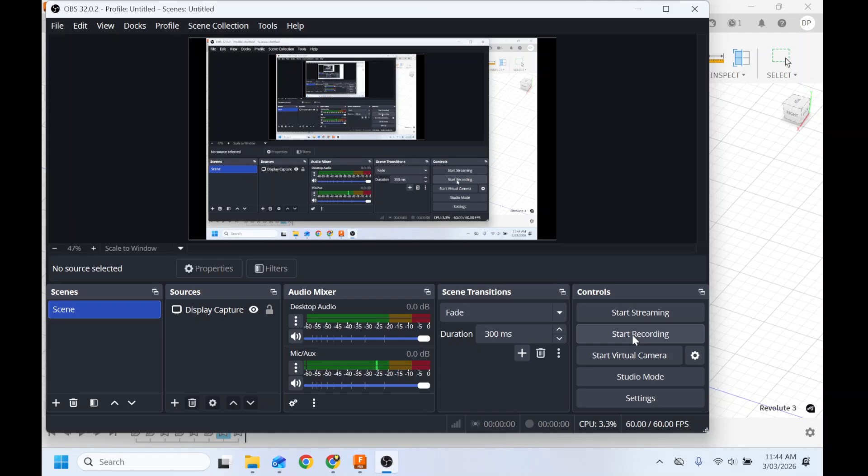Right, this is the tutorial I have where we're going to try to do a piston and liner and crankshaft combination of a motor. The main thing is I'm going to show you how to make individual parts in a single design and then use those to have some sort of relationship so they can be moving.

The moving part will probably be in the next tutorial. We're just going to be making multiple parts inside a single design, and we'll get to something like this. Just let me stop this because, okay, this is the model that this was based off.

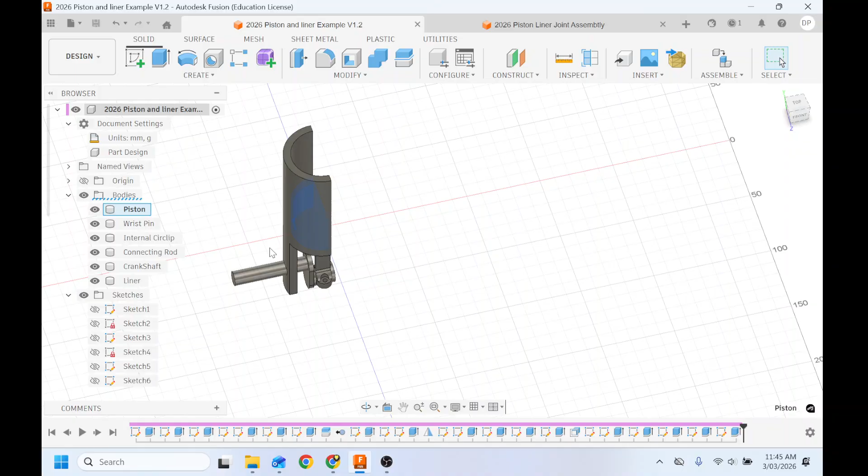Here we have our individual components, and we're going to get to some setup where we can get these individual components of the piston and liner combination. We can even go into more detail, like doing more detailed parts like C-clips inside the piston, and some things don't actually matter because we don't need them to move relative in our design. But this could be relevant if we do stress analysis later, since if this internal clip isn't there, we're going to have a groove inside there. So that could matter for that.

So we'll start by making a new design. We'll make a part design. The way I did this is I started by making the piston first. Now, all my dimensions don't actually matter because I'm just spitballing them and doing them quickly, doing things that make sense visually. Obviously, if you have a real design, you can base it off that single dimension.

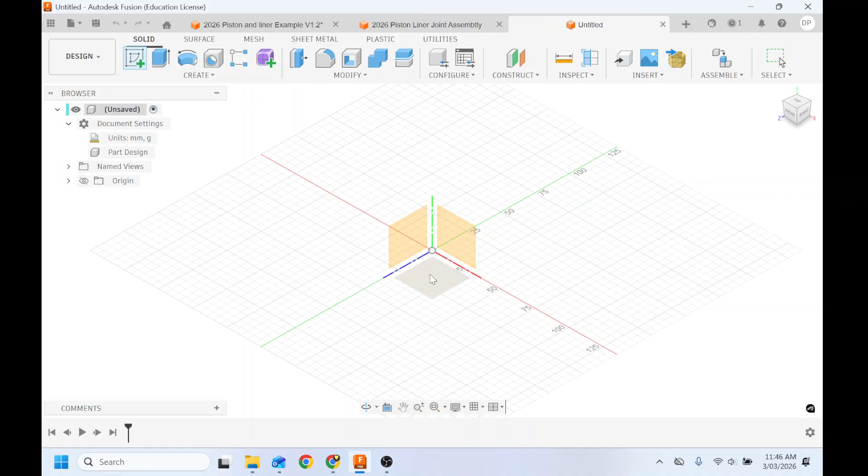To do our piston, we're going to be creating on this flat surface. We'll start by making a circle. Let's say we just make it 50 mil diameter. Done. Then I'm going to start by making the skirt and the outside of the piston first.

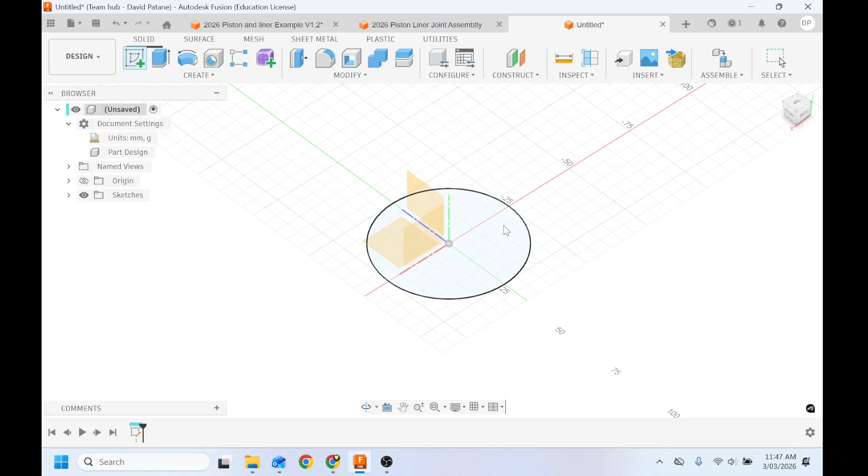So I'll make a sketch. What I want to do is have another circle, hold on, I'm not doing a sketch, let me edit this first sketch I did. So when you previously had Fusion, you would have had this circle, then you would get this circle, and you would extrude this circle into a cylinder, and we could work with that.

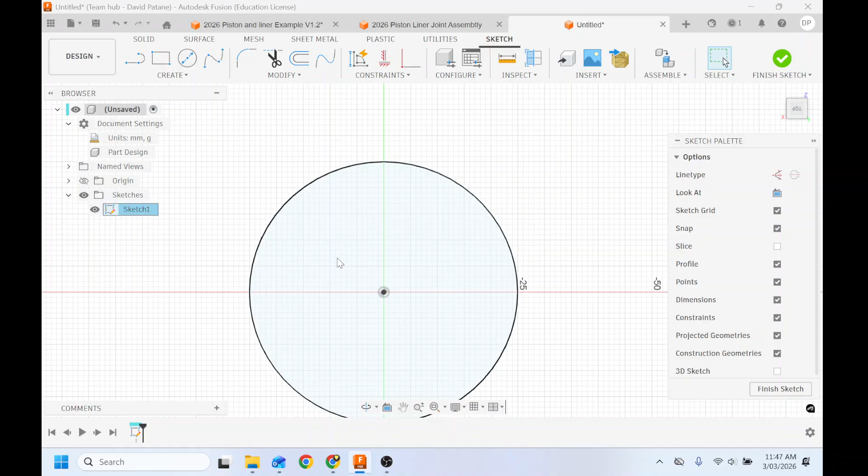But let's try to be a bit more accurate with our drawing here, because when we combine this later, one of the ideas engineers use CAD for is they can change their design halfway through. So let's edit this sketch. We know the insides of pistons are typically hollow to save weight, because you don't want a large weight moving up and down at like 3,000 times a minute. That's going to produce unnecessary load. So we know that the cylinder is going to be hollow.

So what I want to do is add another circle here, and I want to start using the sketch dimension tool, and use that so I can manually put in the exact distances I want. So I may have sped through that, let me do that again.

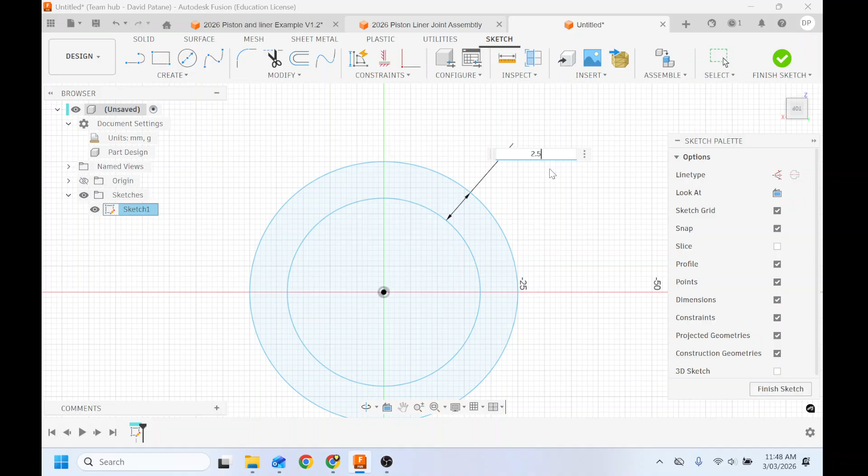So we're going to go to create, once I have my two circles, I'll go create sketch dimension. I'm going to click the inside diameter and the outside diameter, and see how my arrow is showing the distance between those two circles is 7. And so I can change that now - I can say I want the outside skirt of my piston to be, let's say, 2.5 millimeters.

That's the size, but also it's shrunk the outside of my cylinder. So what I'm going to do here is create sketch dimension, click the outside of the cylinder, and over here I'm going to make this again 50.

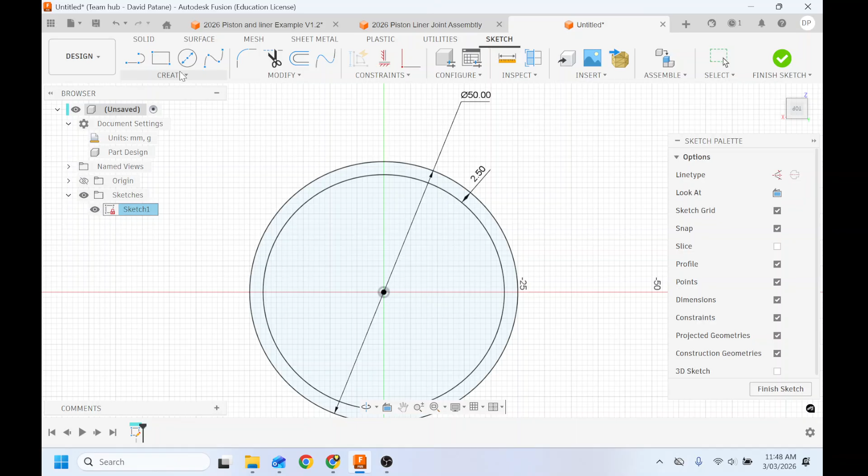Now, if I wanted to also adjust the inside diameter using create sketch dimensions, it's not going to let me do it easily because if I click it, it's going to say you've over-constrained this dimension. You've already said how much you want the outside diameter and how thin you want the skirt, so you can't also choose the inside one. That's called a driven dimension - you can get it to show the answer, but we can't adjust it. So we don't need that one.

Then in my particular sketch, where we're going to have the wrist pin attached inside the cylinder, we want a bit more meat over here in our piston. So we're going to get a line. Let's say I want to bring my mouse anywhere over here where it has that X, which means it's attaching to that line. I'll just click anywhere and go straight down to the other side.

And this line, I can do the same thing - I can do a sketch dimension. I can press this line and say how far away I want that from the center.

And I can pick a number. Let's say I want this to be 15. And then that line's going to come out at 15.

And then I can do another line like this. We can just join this one manually, because that way it will follow the other side.

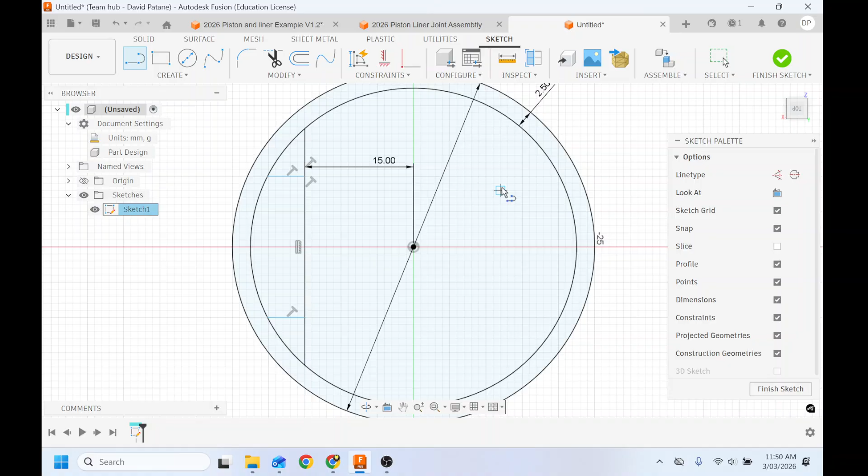I'm not going to mirror it because I'm going to cut this cylinder in half, just like in our previous example. But I have my shapes here, and the last thing I'm going to do before I'm ready to extrude this into a 3D object is fillet this rounded part over here. But it's not going to let me fillet here because I have a circle and a cut line, and it doesn't like that.

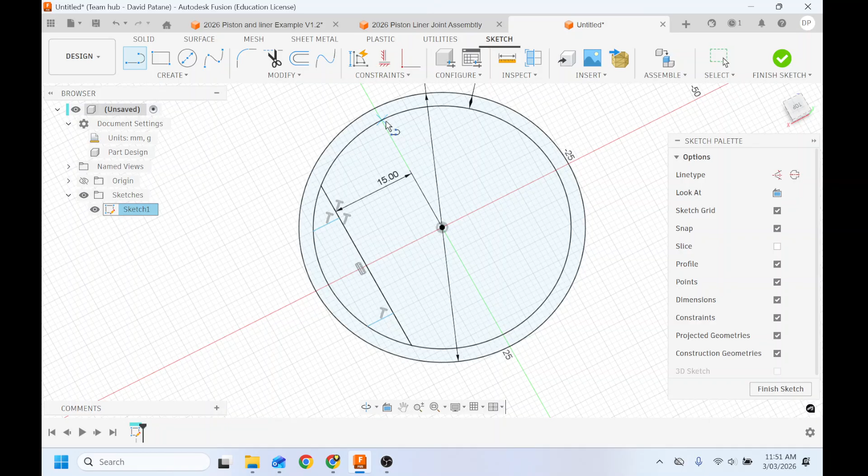So how I found we do this is we actually cut this. Okay, we will actually cut this cylinder in half by doing a line just right through the middle, and we're going to use the trim tool, and we're going to get rid of this half of the piston that we don't need. So this is the part of the piston, the drawing, we don't need.

And now I can go to my filleting tool and press this portion and this portion. That's going to just make it look like a more realistic piston. Finish sketch. This is going to be the skirt of our piston.

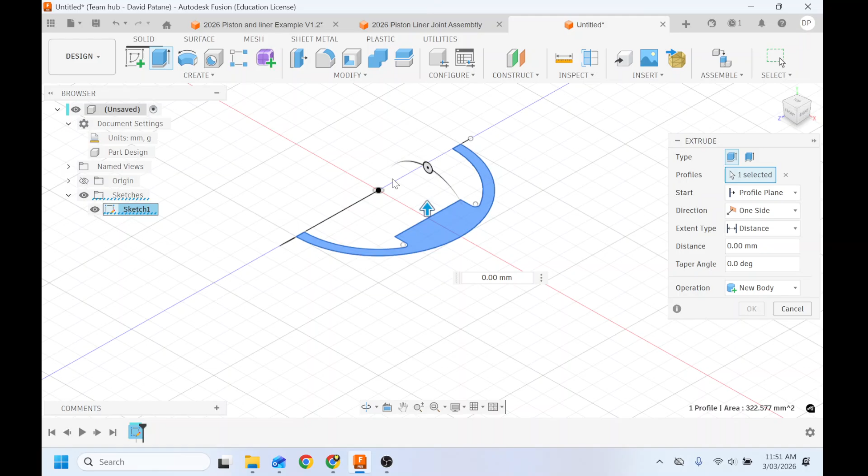I can press extrude and select this profile, and we can just make it as large as we want. So this is going to be everything except the crown, which is the very top part of the piston, after.

So let's just say we want this to be 30 millimeters, just the dimension I have here. And I'll press OK. And then I can make the top of the piston as well.

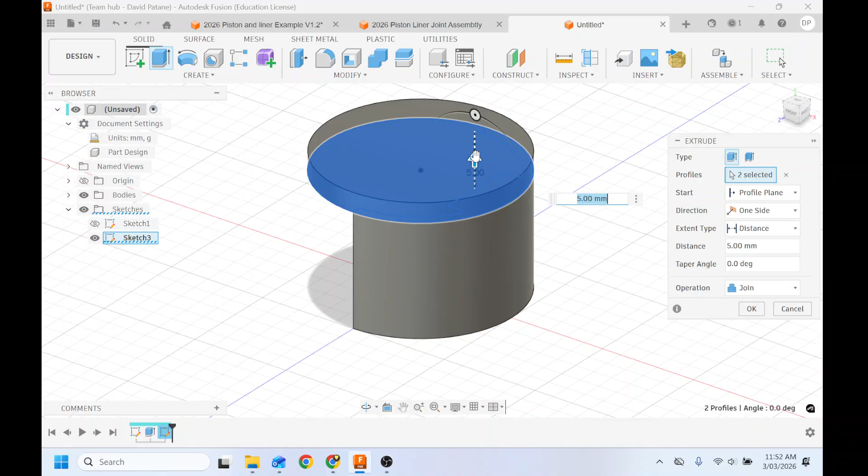I'm going to sketch based on that top graphic. Make a whole circle, press finish. And I'm going to extrude, and for this part let's just say I do the whole thing. And let's say I want it to be 5.

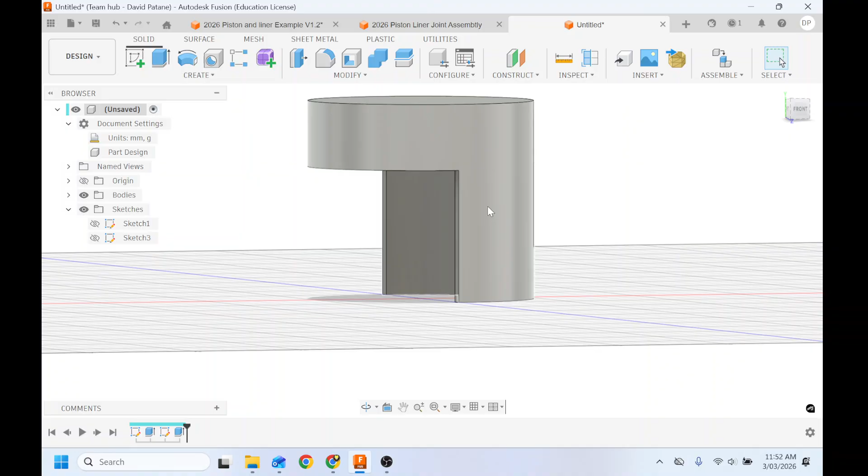And now we can add some features as well to this particular piston. Let's say we want to add some of the ring lands for where we're going to put in the O-rings and the oil grooves. How I would do that is I would go sketch, sketch on a side profile, and I want to use this line as a guide for where I'm going to gouge out some lines in my piston.

Before we do that, we're going to project and include this shape into our drawing. Is it project and include? Project.

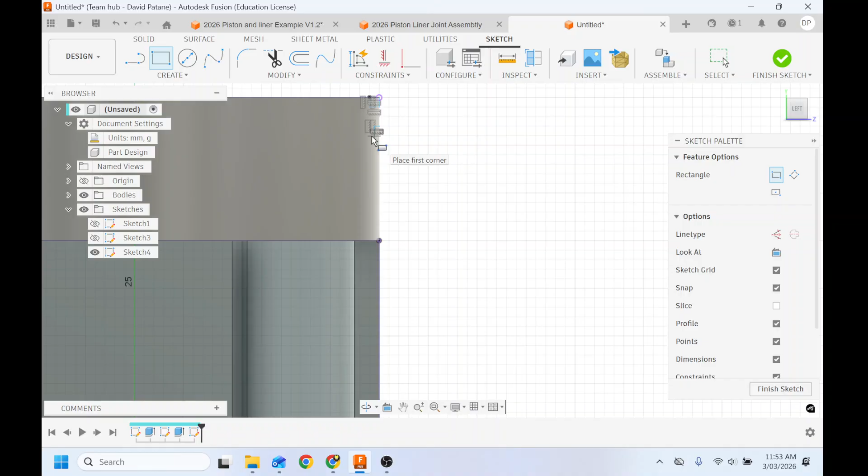So I have these lines here, and now I'm just going to freestyle something that I think looks good. I don't know.

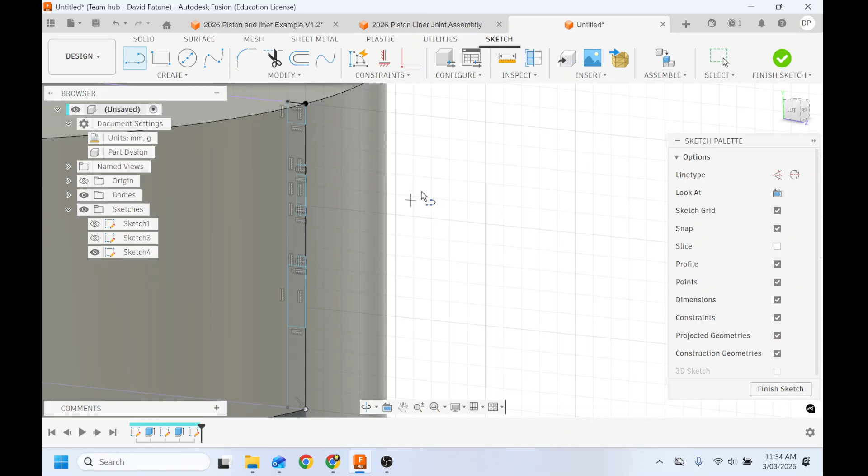Okay, so I have these lines here. I want to make sure I have these parts. These are the parts I want to cut out. Yeah, okay, we'll finish that sketch. We will then, I need this diagonal line, so I need to actually edit that sketch a bit more.

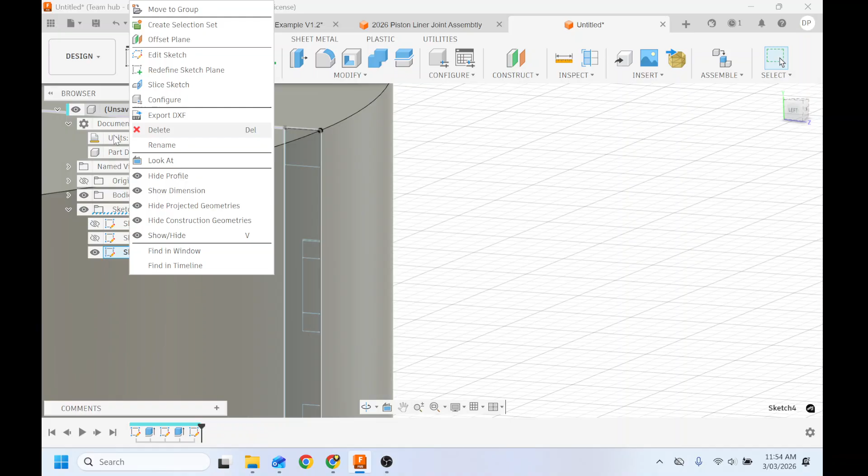So I'm going to use the revolve tool, and I want to select these parts. I want to select this and this, this, and I don't have the big one. I guess we can do this one.

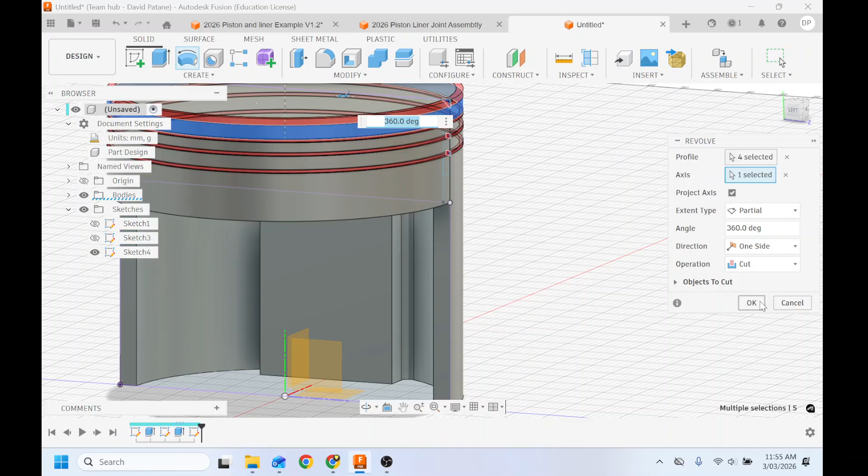Actually, we will ignore the bottom one. I will just do those ones, and the axis I want is the axis of the cylinder itself, and then I'll press OK, and it's going to cut that part of the cylinder, giving us what the top of the cylinder will look like with the ring lands and the crown.

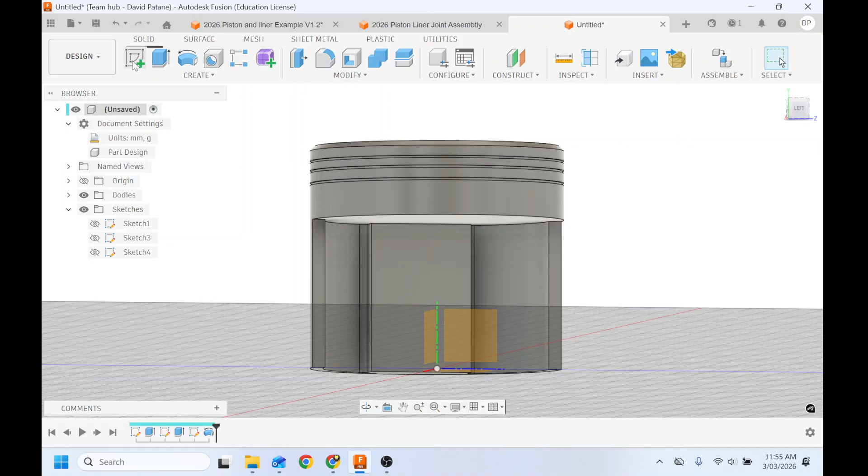Then we will make the hole for the wrist pin. We'll sketch on this wall over here. We will pick a place that makes sense, and we'll just do a hole. 10 millimeters is fine, it's okay. Extrude this out. And then we have that hole over here.

So next step, this is our first body we've made, and what we're going to do is start labeling these bodies, because it's going to get confusing very quickly as we add more and more bodies here. So we're going to name this as the piston.

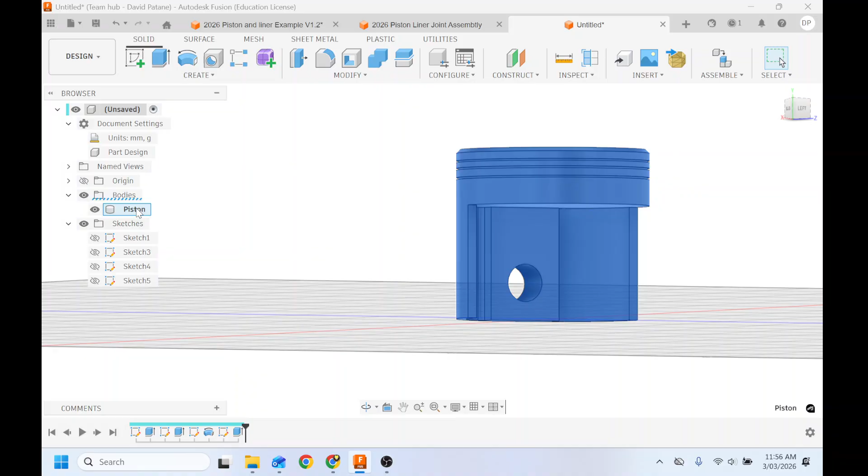Piston part. The next part of the piston we're going to make is the wrist pin, which is the part that connects inside here. So we're going to create sketch. We'll use our piston itself to make this part, because if we press that face as the basis of our sketch, we can use its geometry to make components.

So I have that circle there, and I finished that sketch. So we have this profile over here. We can extrude.

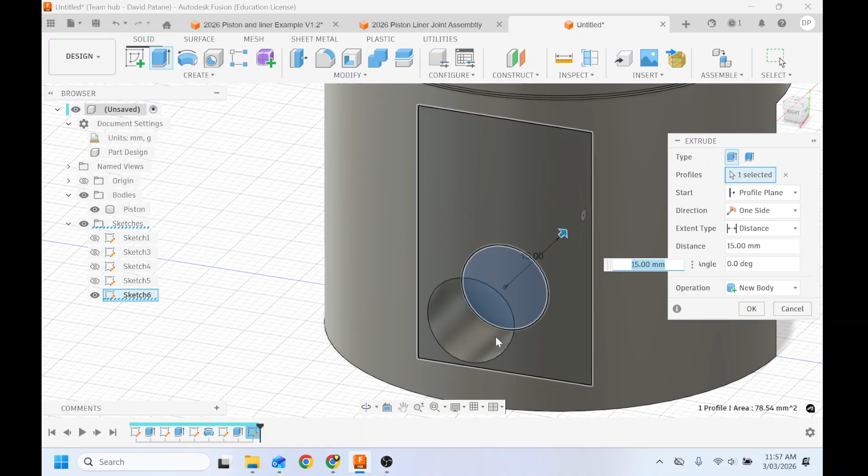And this particular shape, if I bring it out, I just want to bring it to the halfway point because we will be copying everything later. But I want it to extrude in both directions here, because otherwise it's not going to come out into the piston and it's not going to look like it makes sense.

So I'm going to do a two-sided extrusion. Let's say I want it to come into the piston about 6 millimeters. We can do later when we do our stress tests, how much we overlap, that is going to be relevant because that's how much contact those particular surfaces have.

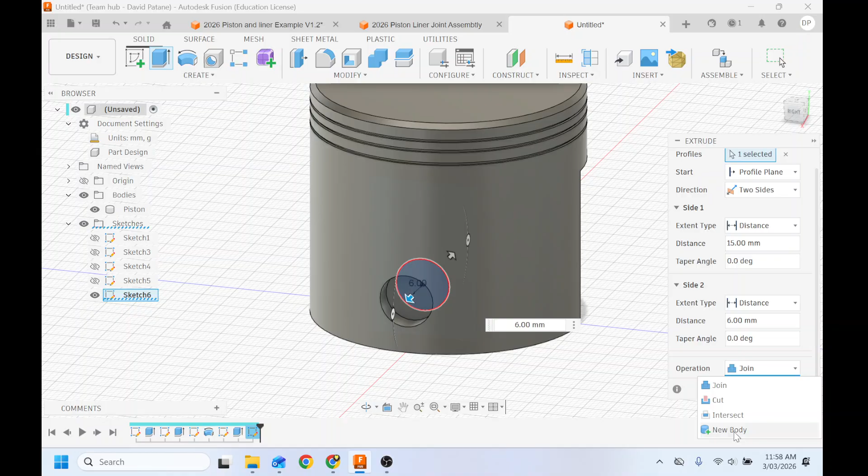By default, if I press OK here, they're going to be joined and it's going to be a single component, which is okay if you're just doing a drawing, but we are going to be animating all these later. So I need these all to be individual bodies or they're all going to be moving together. So instead of joining, we're going to say new body over here, and then we'll press OK. And then we'll rename this wrist pin.

And then we see we have that component there. We can use this new pin's location over here to do that little groove that I have in my other drawing, for us to put in the circlip.

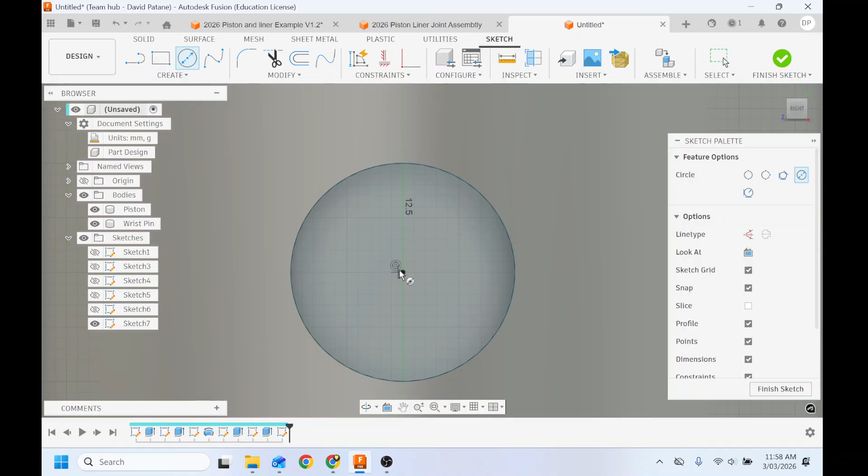In Create Sketch, we can press this face over here. We know this is going to be slightly larger. So let's say that's the inner dimension, and I want the outer dimension. We can use our same sketch dimension tool. We can say we want 0.5 millimeters for how much we want it to cut in. We'll press OK.

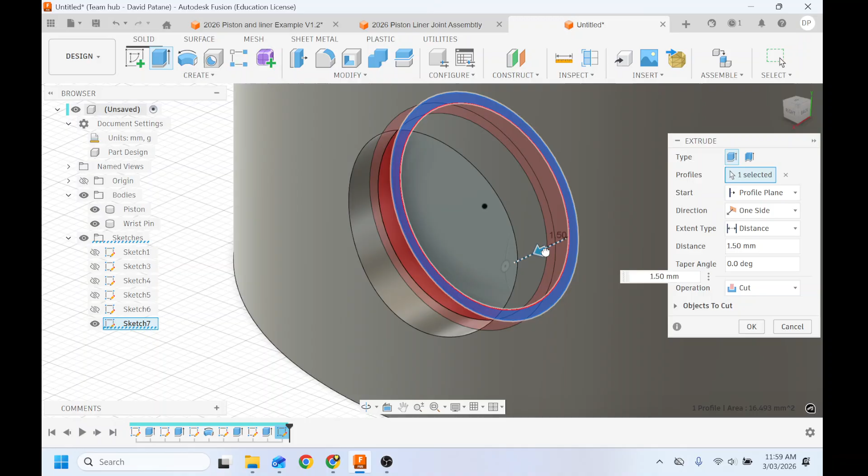And then we'll go to extrude, and we want to extrude this 1.5 millimeters. And if we press OK, is it going to join them together? No. Okay, so now if we hide this wrist pin, we see how we have this little groove here.

Which we can use to model, like in my other model over here. I have this little internal C-clip that we can model in there.

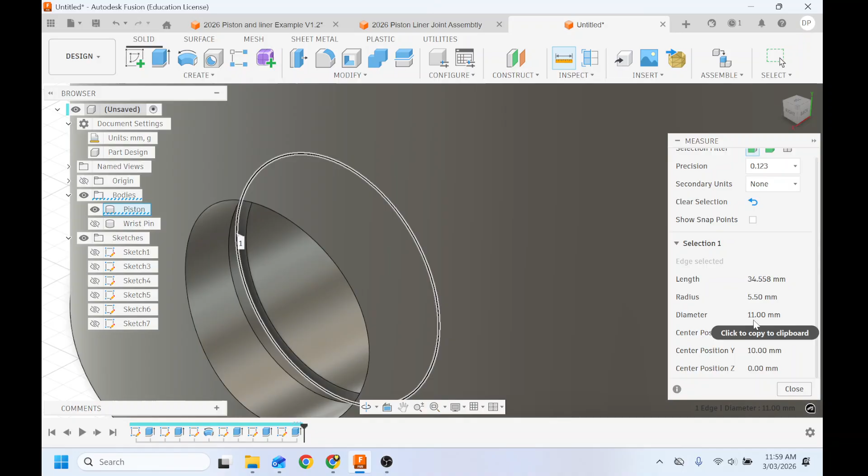So then we can know one of the reasons why we can use CAD over here is we can measure this. We can press the inspect tool. We can see what this outer diameter is, and we can measure it. And its diameter is 11 millimeters. So I already know that I need to get a circlip that is that particular size. We know what size parts that we already need to order for this particular piston.

Then we will go with the connecting rod, which is also called the Conrod, I believe, for short.

For this one, again, create a new sketch. For this one, I will just pick the sketching plane. I don't need the piston for this one, so I'm going to hide the piston, but I do need this wrist pin. So I'm going to press in create, I'm going to make sure I use it by pressing the project tool, and I'll press that surface and I'll press OK.

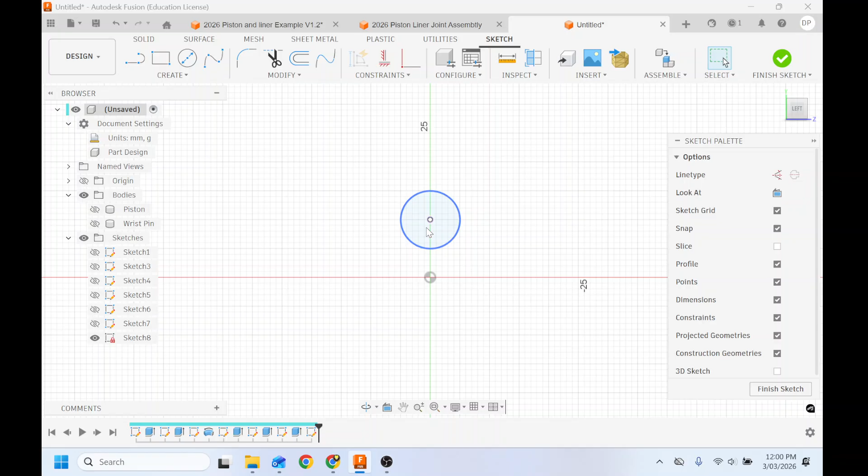And so now, even if I hide the wrist pin, I see that purple circle. So it's saying, hey, use this geometry. I want to use this geometry.

I'm then going to make another circle on the outside. And again, I'll use my sketch dimension tool over here to say how thick I want this. Let's say I want this one to be 5 millimeters thick, is how much meat I want around that particular part of the piston.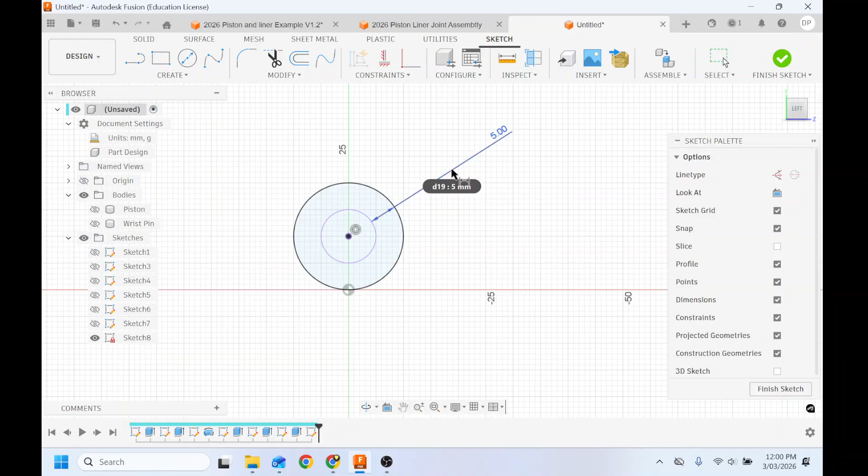And then let's pick a point. I can pick the length of my Conrod by going down. Let's say I want 100 millimeters is the length of my Conrod. And I can confirm that by going to my sketch dimension tool and saying over here 100. So 100 is that length I want from the hole where my wrist pin is, to the hole where my crankshaft is going to be connecting in the Conrod.

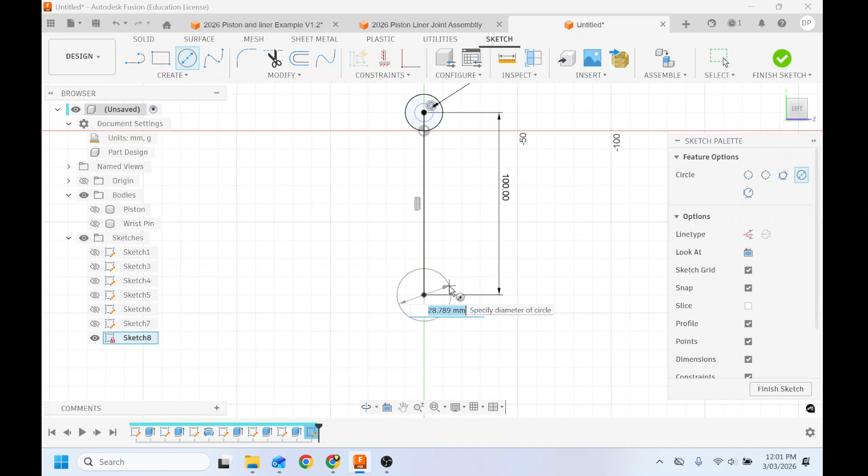Let's make this one slightly larger to make it look cooler, I guess. 30 - that's the diameter of the inside bearings.

And I can continue by making the outside by the same process. So I do the second circle, I do the sketch dimension, click here, click there, and let's say I want this one to be 20 mils. Actually, that's too big, doesn't look right. Let's go 10 mils. Okay, so that is 10 millimeters for that part.

And if we look at some diagrams for connecting rods, they have it wider at the base to accommodate some sort of a bolt connecting the top and bottom of this together. So we can do that.

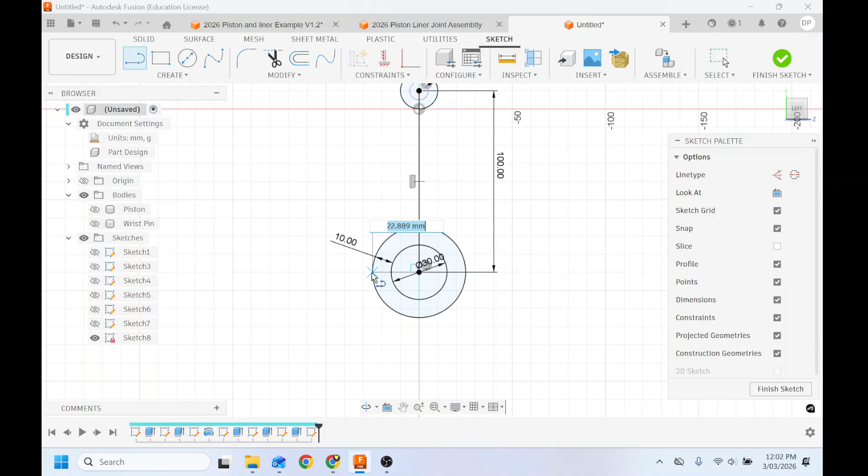We can send a line out here. We can say we want to go to 30, and then we can say we want that to be 10 mils high, and then connect it like that. So when we make this in 3D, it's going to look better.

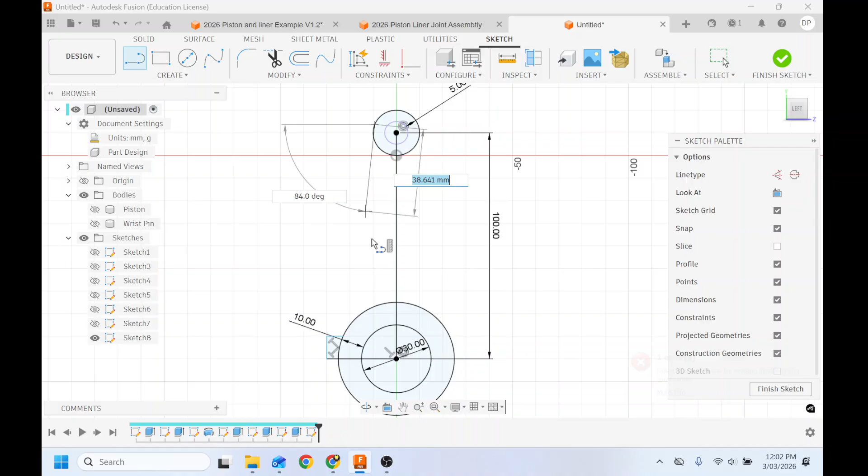Then we will want to connect these two together. You can do a process of just - we can press constraints, I believe, constraints, and we want tangent. We can press tangent of this circle and tangent of this circle, and it should just generate us a line. We'll generate a line here and here, and as we bring our mouse over, when we get the circle, when we get that symbol, that's the tangent symbol, and I believe we can edit this top one over here.

We can drag it. Can we make this one? How do I make this one a tangent as well? If we highlight both the curves, there we go. I can make it a tangent on the top and a tangent on the bottom.

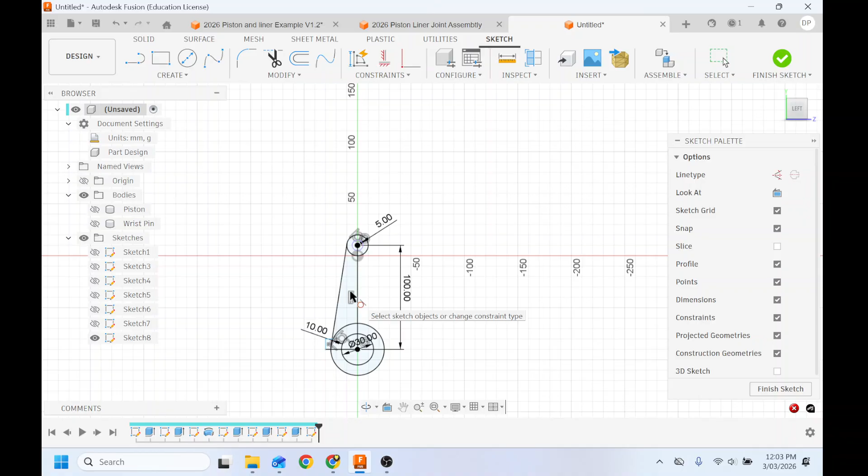But that's the simplest form. We might use that later for our crankshaft, because that's a good looking shape for that. But in most images of pistons that we see, they don't have a line going that way. It's usually vertical to make it even thinner.

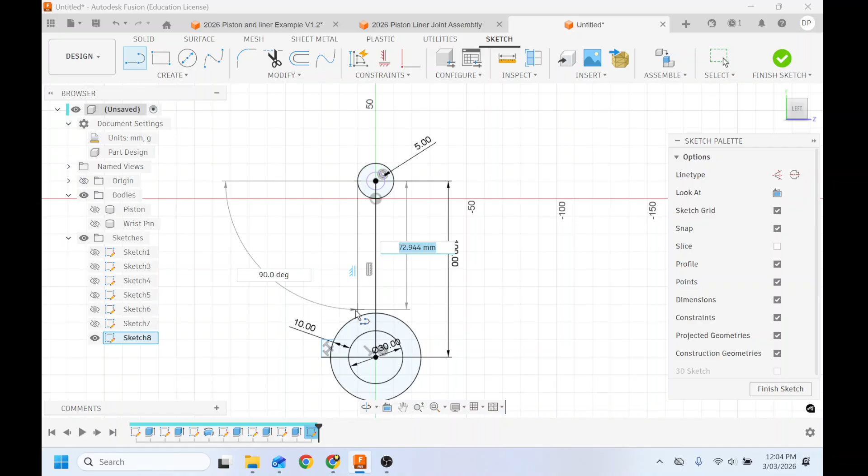So we can do that. Let me just delete this part. Delete. We will get a line here going straight down. And then we'll use our filleting tool to make this edge rounder. There you go. We don't have to round off this part because that part is fine.

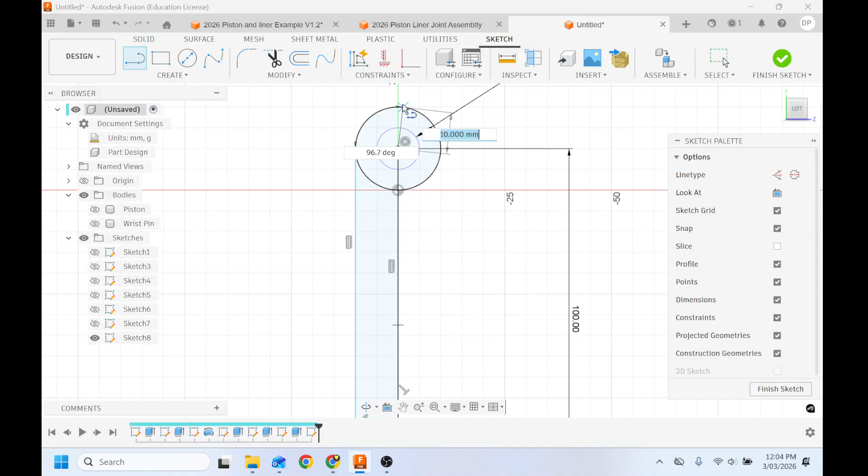And then all we've got to do is cut off the parts we don't want. We don't want this part or this part. We need to finish, we have to bring a line up here through the top, and we might have to do this actual circle over here. So that's the shape that we're going to make into 3D.

We'll extrude this, and we'll just open up the other parts so we can visually see it to make sense. Of it, that thick, sure. That looks like it's fine. 10 millimeters, wonderful. Again, we don't want to join.

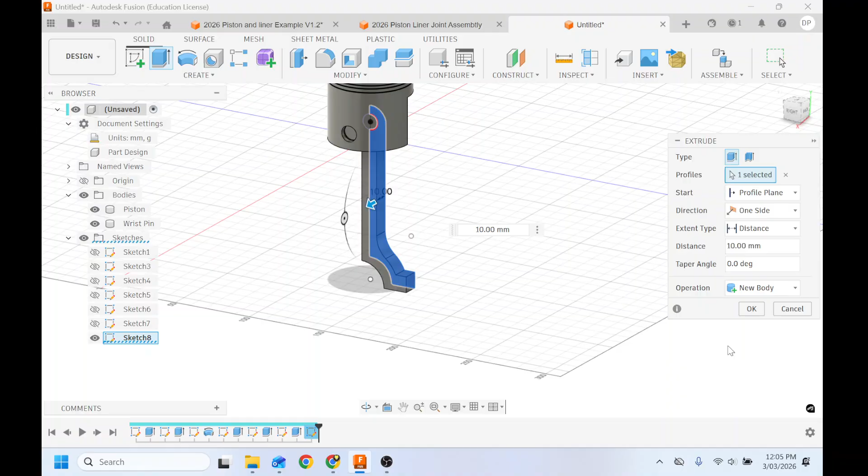There's going to be a new body. And this new body we will call connecting rod.

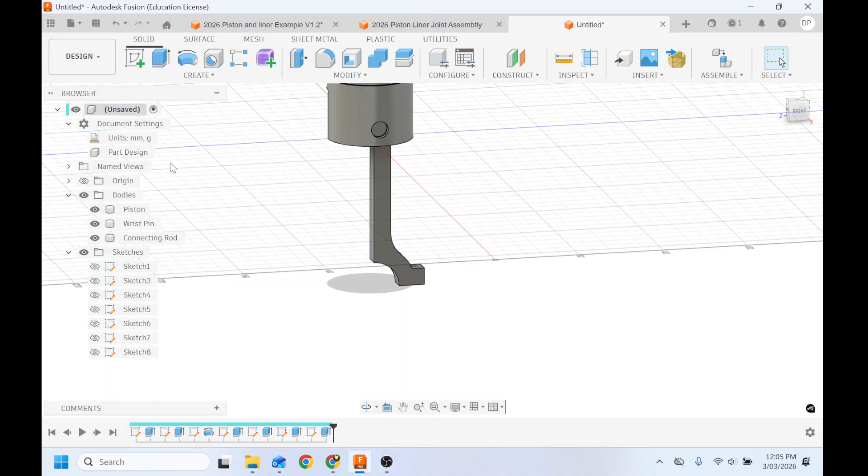Now, my other drawing, I have it making it look a bit fancy. We want to thin it out. We know these typically have the inside as being hollow to save weight. So we'll hide these parts. Feel free to constantly hide and unhide parts of your model so you can get access to the detail.

Sketch this part over here. There are a few ways I tried before. If you press offset, it sometimes works. You can get the general shape of the parts you want to cut out. So you could do like that.

But I want to do it properly. The only issue with this is it's going to want to cut out this part of the bottom, which isn't really ideal for us, but we can use this offset tool. We can say minus 2.5, which is going to give us this particular shape, and it's going to give us this line.

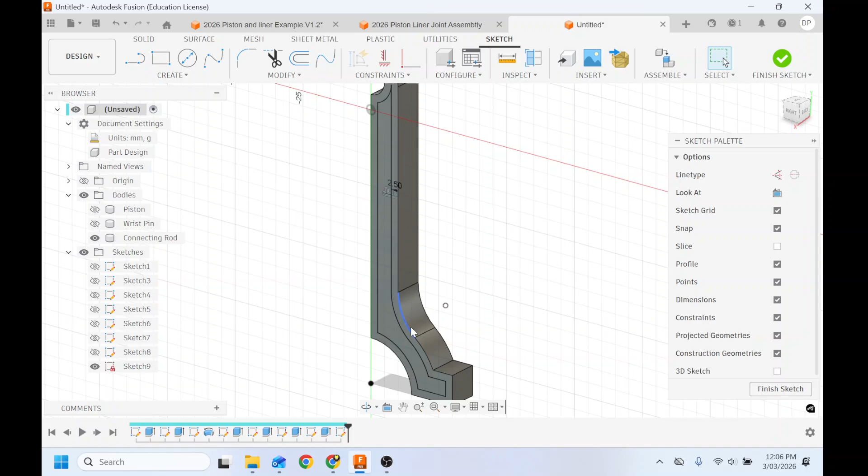We don't have to use this whole line. So let's say we don't want to cut into this bottom part for reasons, right? So what we'll do, we're still editing the sketch, we can still go here and let's say we don't want anything under that.

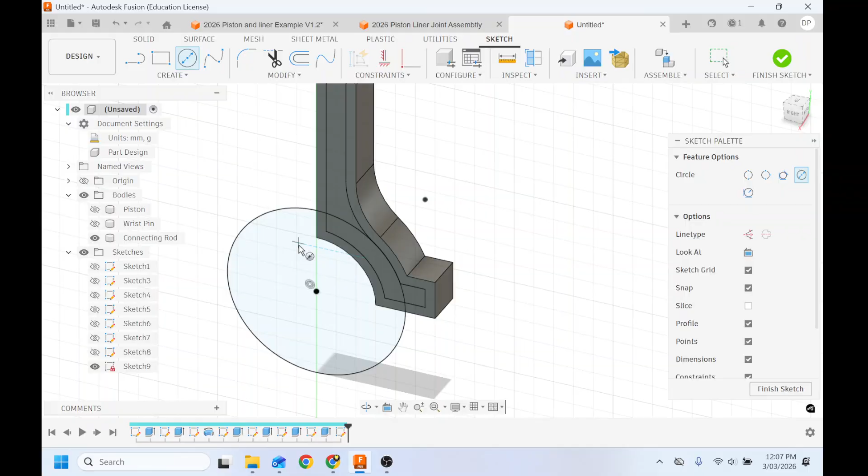Then we can cut off everything we don't need. Oh sorry, not that tool, this tool. We will keep that.

And now we should be able to fillet these, right? Is it not letting us fillet? Why isn't it letting me fillet this? Is it because it's not touching? Interesting.

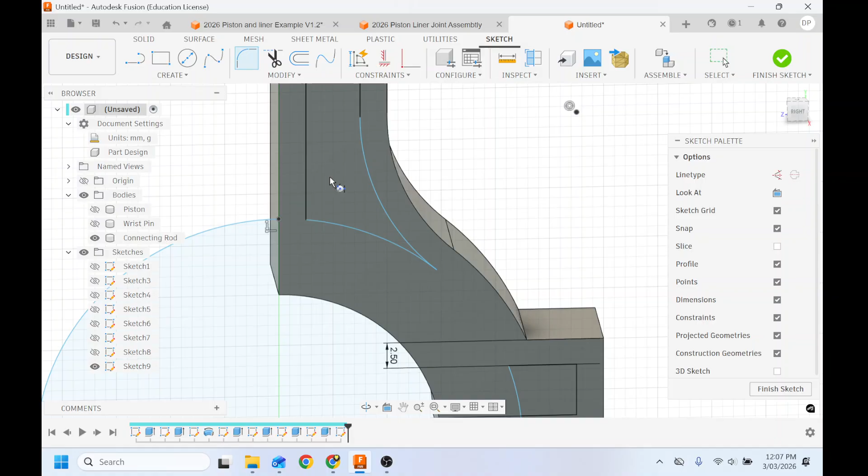We just select both if we select both the curves, we can fillet it. So let me show that again. When we select a curve, we just hold the shift button and then we press the other curve, and then we press the fillet and we get that nice little fillet there. We can do the same thing up here, I assume.

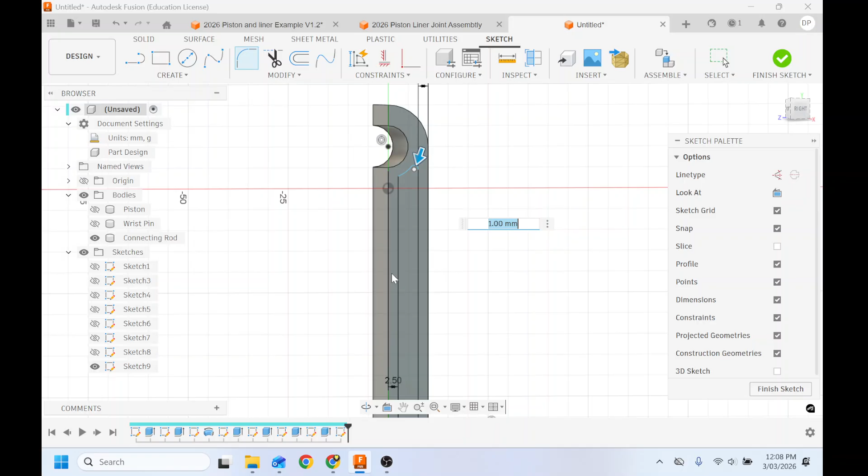We will press this shape and this shape. We'll have that lovely 1 millimeter fillet there. One thing we didn't consider is it's going to cut out this part in the middle. We don't particularly want that, so we'll just use our drawing tool to force it to make some parts that make sense for that.

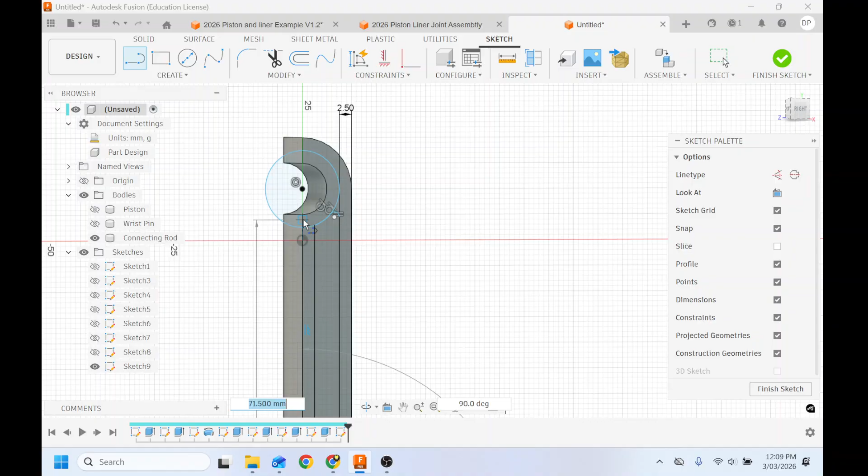Okay, so now if I think this is done, I should be able to select both of those profiles and we'll extrude this. Now in my presentation, see how this is right, this is on the correct side that I want it to be on. And so my idea is we'll end up doubling this later to make it double as thick, but for now, this is just the shape I want.

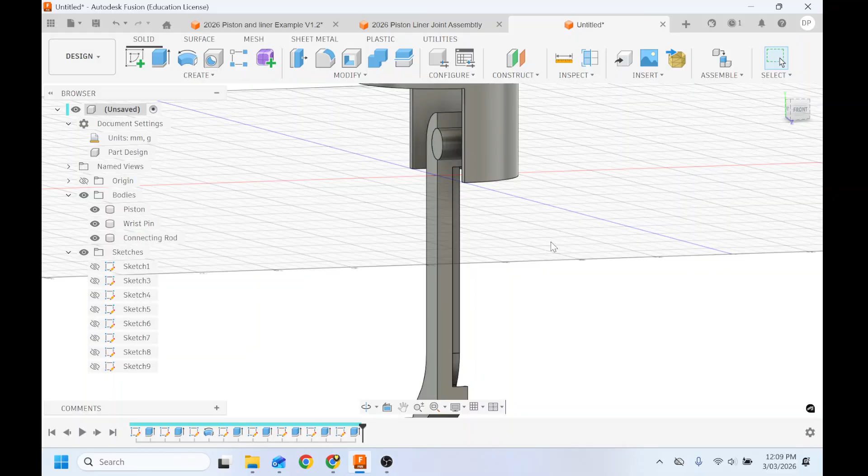We will bring this in, press OK, and there we have the inside of our piston now, which could be relevant again when we do our stress test. We can see if that's going to work for the shape of our piston.

So now the last part we're going to do is the Conrod, and here's how I did it. Okay, sketch this part over here.

Here's our first part that actually matters, because as we're going to rotate our piston, I'll show you—here's a good point to show you this particular final drawing. As we, can I modify?

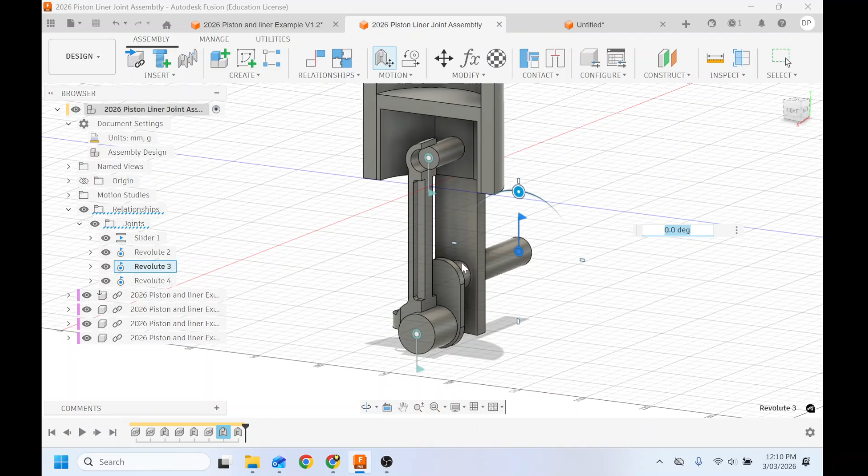When we have the piston at the bottom like this, we see here the length between—this is as low as the piston will go, it will be at its bottom. The maximum radius or diameter that the conrod can move is limited to when it gets all the way to the top, like where the piston is. Right? So how do I do that graphically?

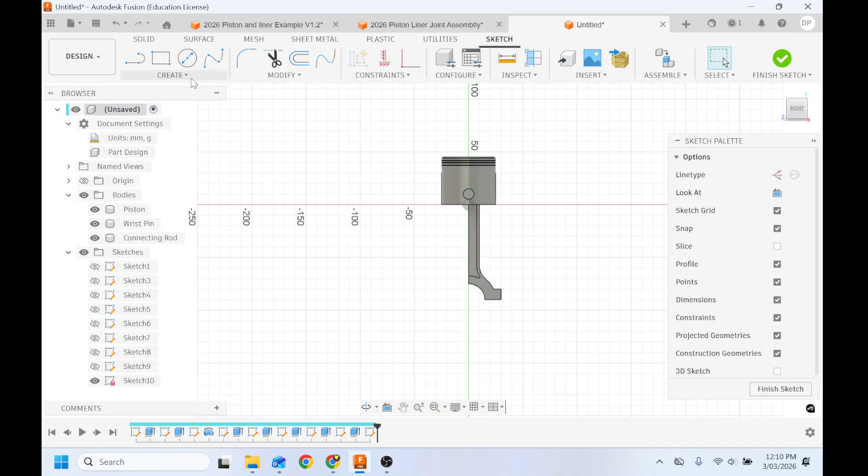Or how do I calculate that using here? I got my sketch. As always, I'm going to project the parts I want—the base over here, and this whole curvature over here. So I know I need a circle of a particular radius. We can inspect that and say this one is a radius of 15. And I need this top of the circle to not go above this part over here.

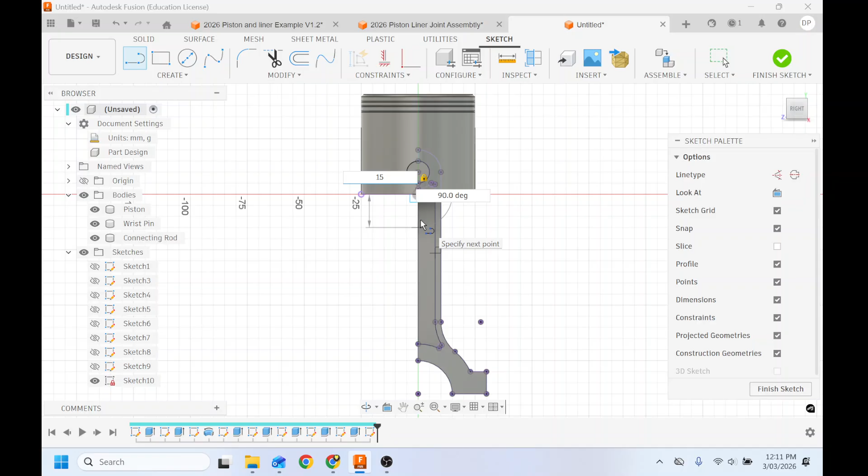So I'm going to draw a line from here, down 15. Right, so this dot over here. I'm going to use this as the path that my crankshaft will follow. This will be the very top where that dot is, and the bottom will be where this particular dot over here is. I'm then going to use the

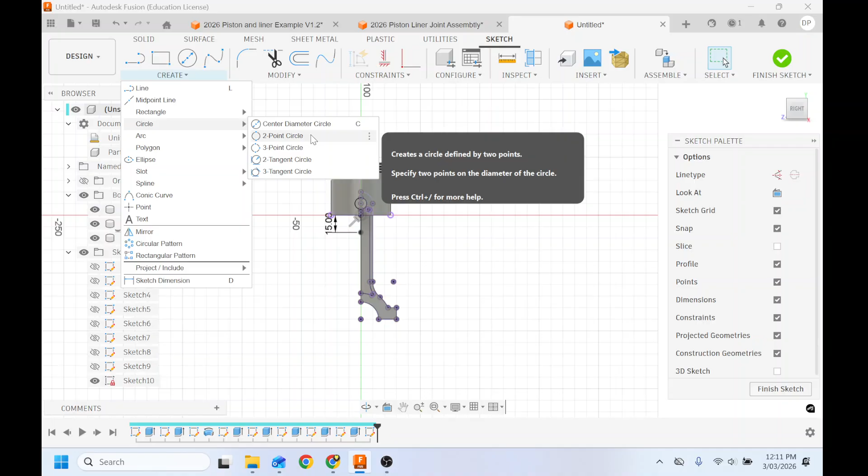circle tool—I'll use the 2-point circle tool. I'll press this circle over here and this one over here. So that's the circle, that's the path that the bottom of the connecting rod is going to follow. And I can also use the center of this circle, so that is the radius that the crankshaft is going to rotate around. I will use this sketch later for that, but for now let's just make this particular circle of this size.

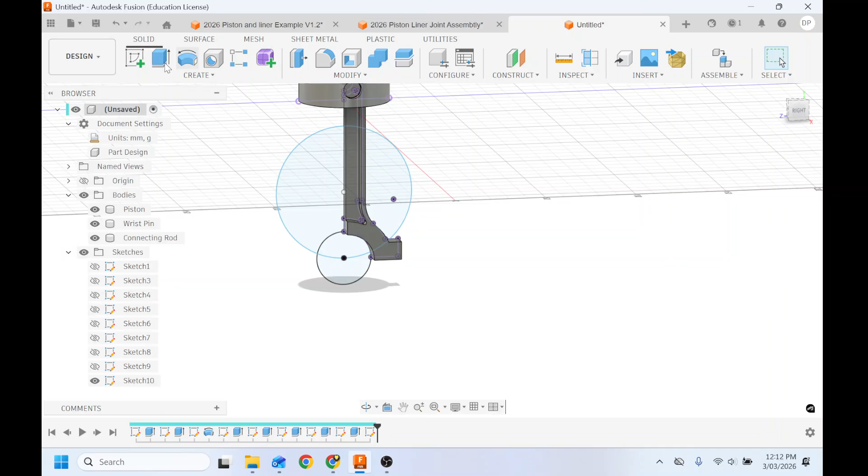Finish sketch. We'll make this that big—let's say we want it to be slightly larger. Again, you can be more accurate with your things because you have more than one class to do it. We got that part there, and then we can do the crankshaft.

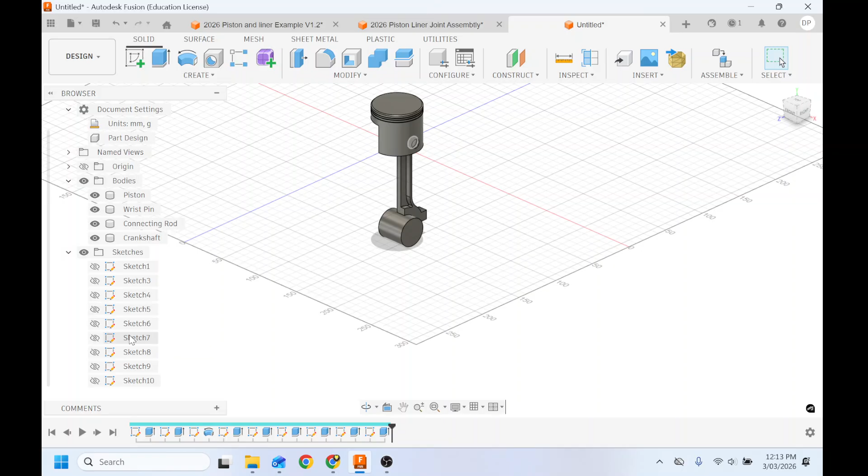So I made a mistake—I made it a join. I'm going to go edit there, and I want it to be a new body. This is going to be part of the crankshaft. Then Fusion, as always, hides your sketches once you've used them, so I'm going to unhide our first sketch that has that circle we wanted.

I'm going to create a sketch—sorry, not create a sketch, I'm going to edit this sketch that we had visible before. Edit sketch. I'm going to make another component—the center part of this crankshaft. Let's say I want that to be

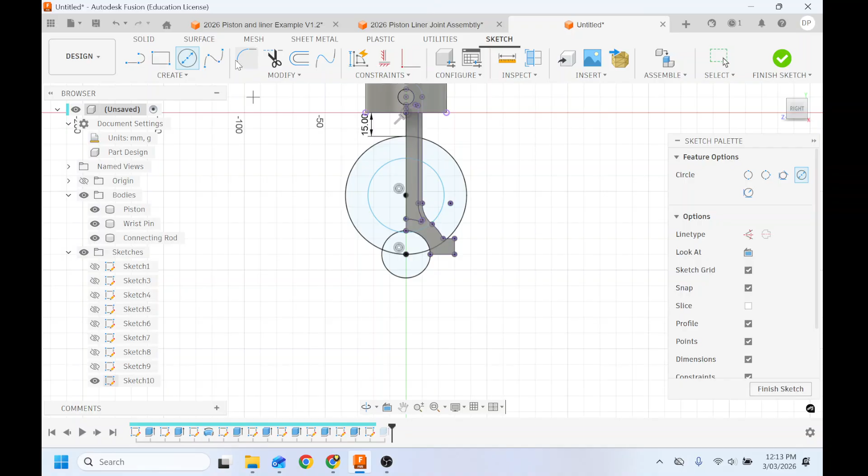sketch dimension 20. Finish sketch. Extrude.

So when we extrude it, we want to extrude in this direction, and we want to offset this, because by default it's going to start here and touch the piston, but that's not really where we want the conrod—the crankshaft to be. Otherwise it's going to get too close to our piston. So we're going to use, instead of starting from the sketch, we're going to offset it.

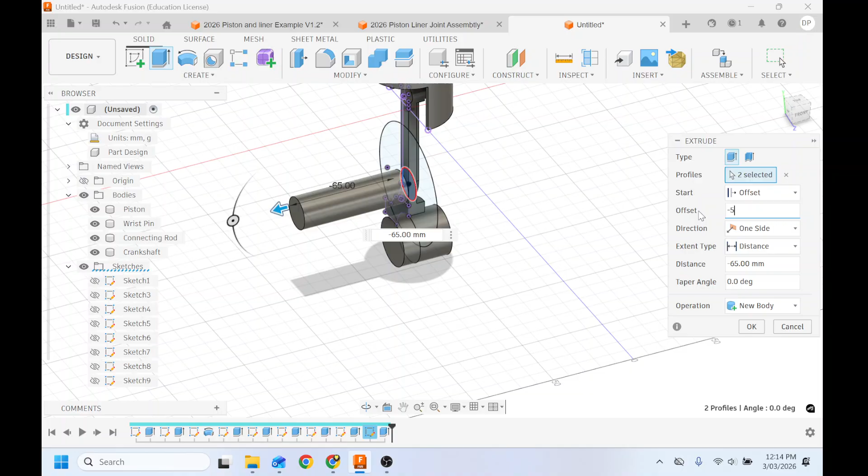Which means we can do a tool over here, and if we press minus 5, it starts offsetting that particular part. Actually, for this one, I'm going to go minus 15 because we'll join it later. And this is going to be the crankshaft.

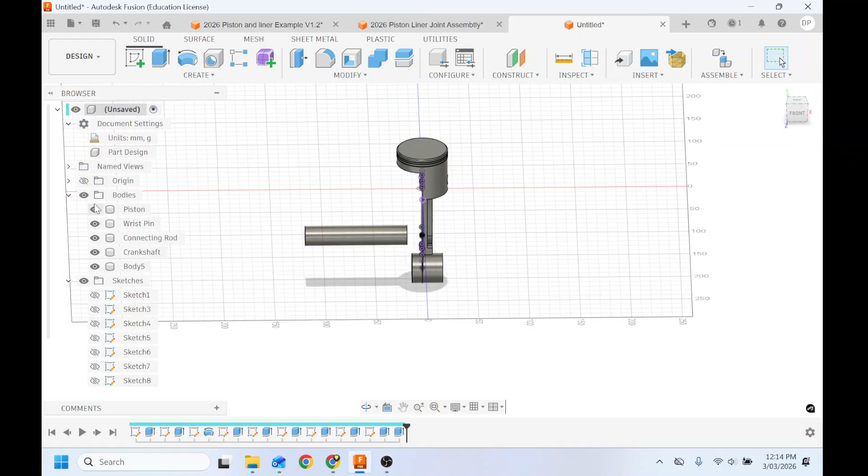Okay, and that should have made a new body. Now we're going to join these two together. I'm going to hide the piston, hide the wrist pin, hide the conrod. And now we can actually hide this sketch—we don't need it anymore. But we want to link these two together.

So we'll do that—sketch over here. We will project this, the bottom, the lower part over here. Okay, we will use the tool we had before. We do this and this. And then if we do a line, how do we do that?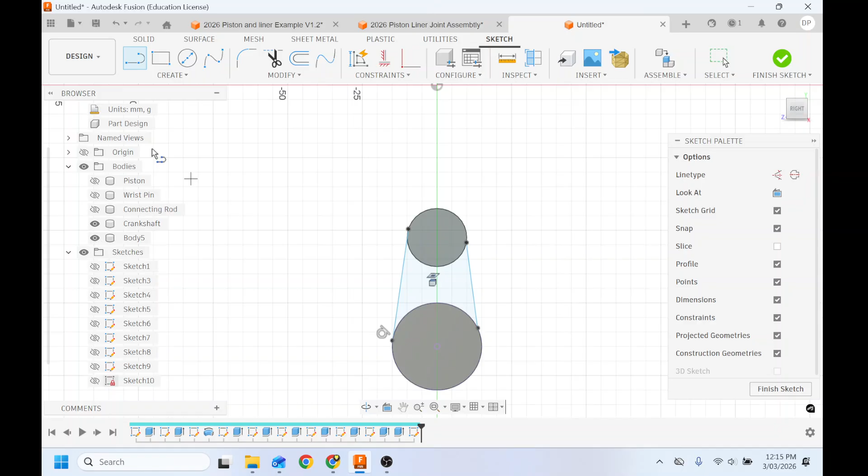We do this like that. And then if I go, I'll do another line over here. And then I will press escape and I will press this and this. And I should go over here, make it a tangent and do the same thing, this. I'm holding shift so I can select multiple parts here.

Oh, it's already a tangent. Press this line and tangent, okay, and this one and this one. There we go, so they're all tangented. And now I should be able to cut. Can I cut that? No.

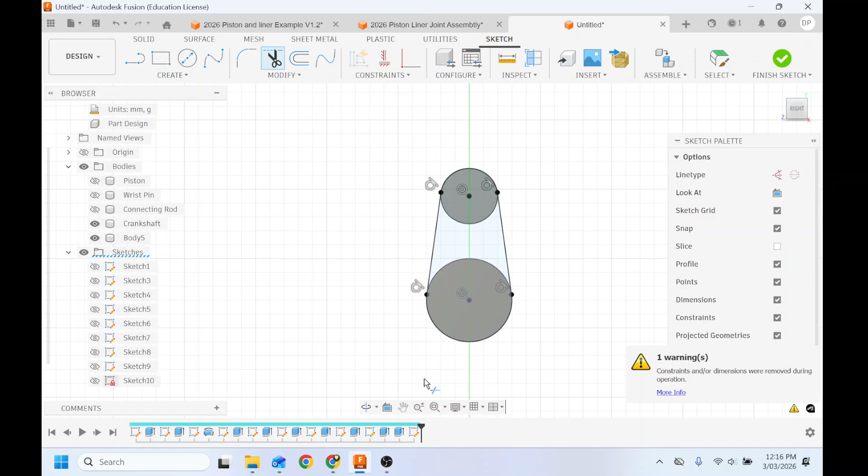So all I've done here is add a line on the outside using the offset tool, and I want it to be slightly larger. A -5 will mean I have 5 millimeters of material around it. This is the size I want that shaft to be, the connecting part.

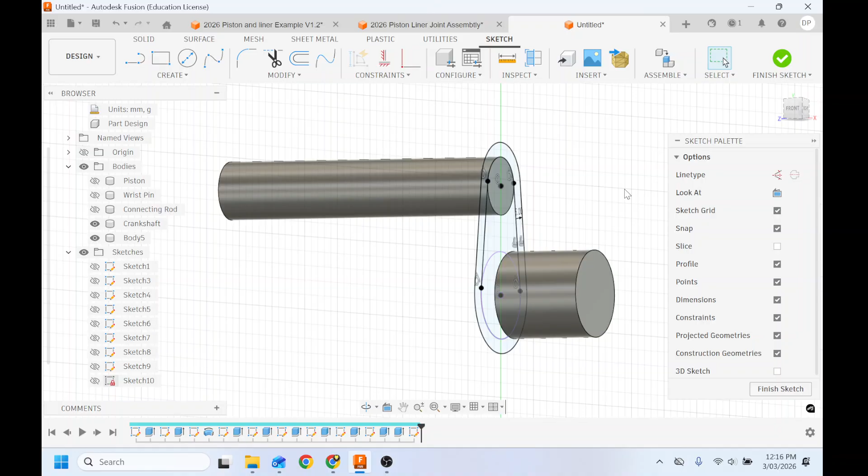And then I'll just extrude these together, and it should work since I hid everything else. The reason I hid everything is I actually want to make these two parts join together. If everything is hidden, it won't consider it in the join, but I do want these two connected, so I should go like that. Now body 5 and the crankshaft should connect together.

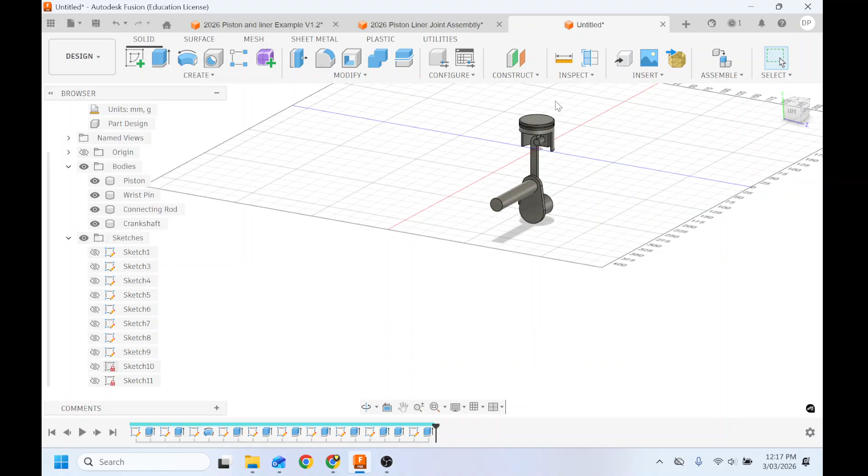Wonderful, so now that's all the components we need to actually start doing our piston. And we've obviously done half versions of all these components, so you'll want to make them into the full size. You can use the mirror tool.

So for example, let's do the connecting rod. When I do this, I would like to save the design at this particular point.

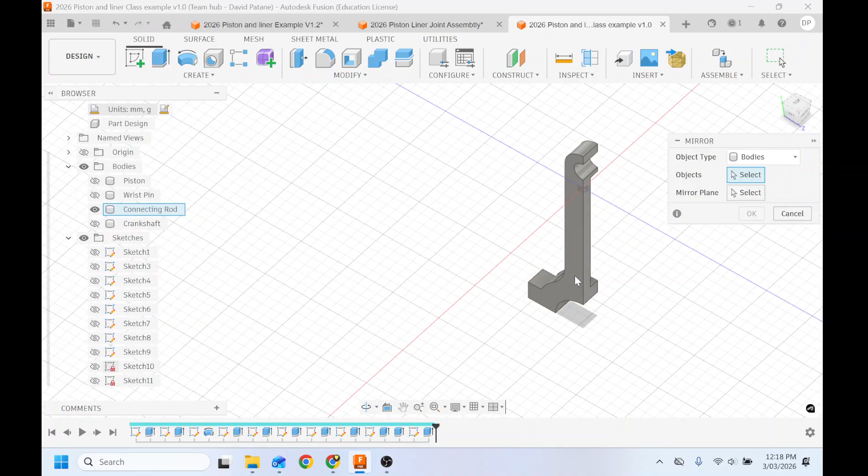So I want to mirror this particular body. The mirror plane, I want to mirror it like that. Press OK, so then now we've got that thickness over there.

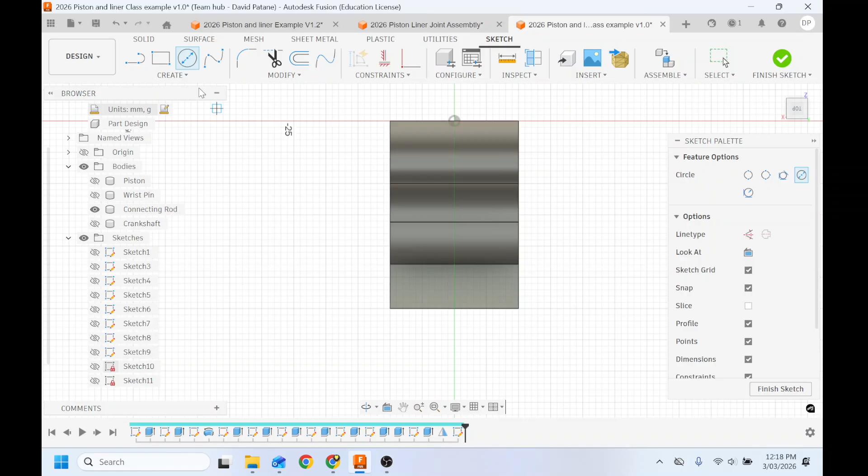And before I finish the mirror, I'm going to drill the holes in here so that I don't have to drill the hole twice. Let's say this particular one needs a 5 millimeter hole because that's the size of the nut we have. Press OK.

Extrude. We'll extrude this in both directions, up and down. And then, the bolts have a bit of thickness themselves, so we also need to cut a bit more into here. Let's say we want it to be 10 mil, we need to cut a bit more to fit.

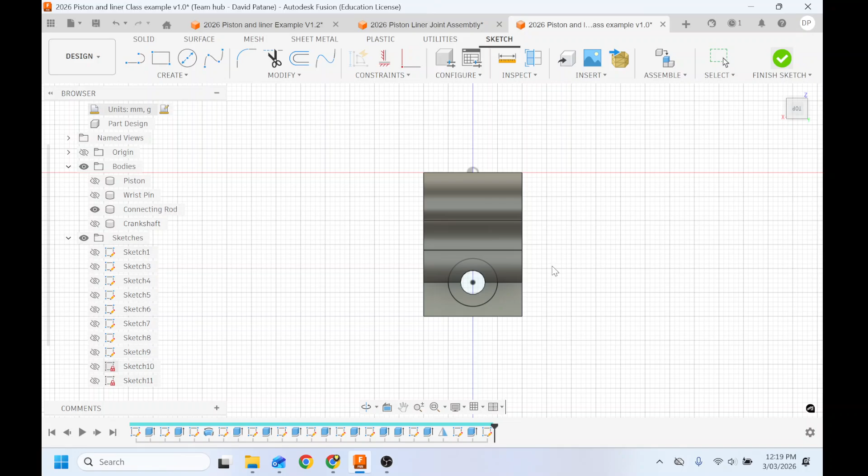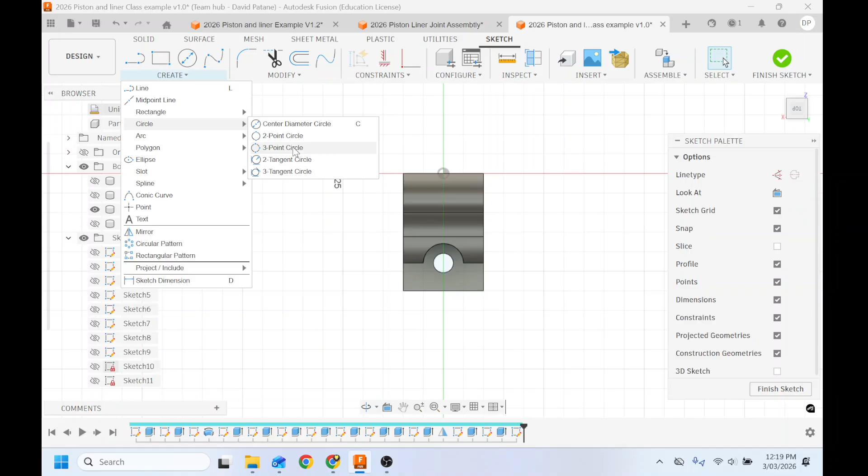And then we might also want to do things like round off. How did I round it off? I made it look very good in my last one. I think I went here and did a 3 tangent circle for this line and this line, and so I have that lovely looking circle like that.

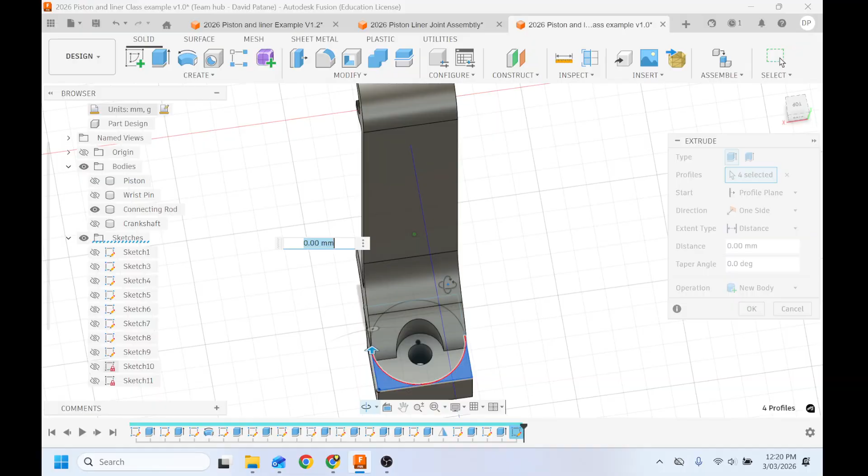And then before I finish that, I needed to cut off this particular shape here, including this part over there, to make it look good. Use symmetry just to cut off the top and bottom, and we go like this.

That's going to make that part of the piston look nice. And then let's say I like this, it all looks good. I can then mirror this whole shape using this particular mirror plane over here.

And what we'll use is we'll use this particular part in one of the stress analyses. This will probably be a good one to show because we can see there might be some small cracks generating in particular areas of this part.

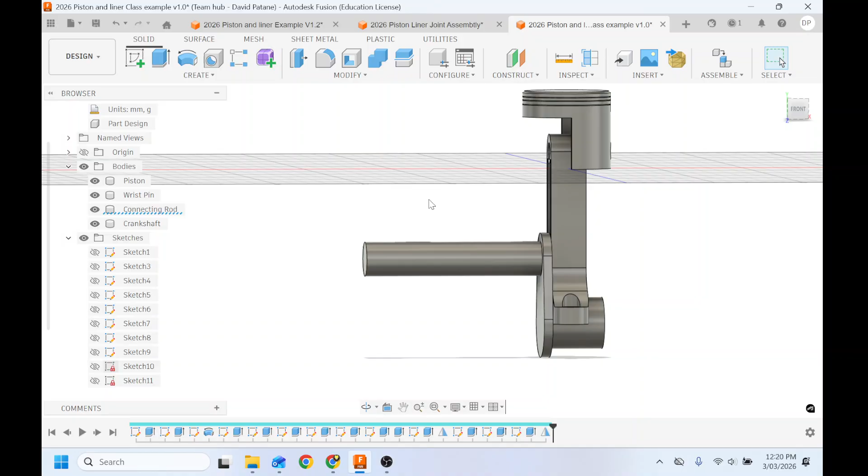And then I would save this one as... it's probably a bit too thick there, but we can adjust our components, I'll show you how to do that. But first, I'm going to save this one as file, save as, and we're going to save this one as version 1.1, so I know this is version 1.1, 1.2.

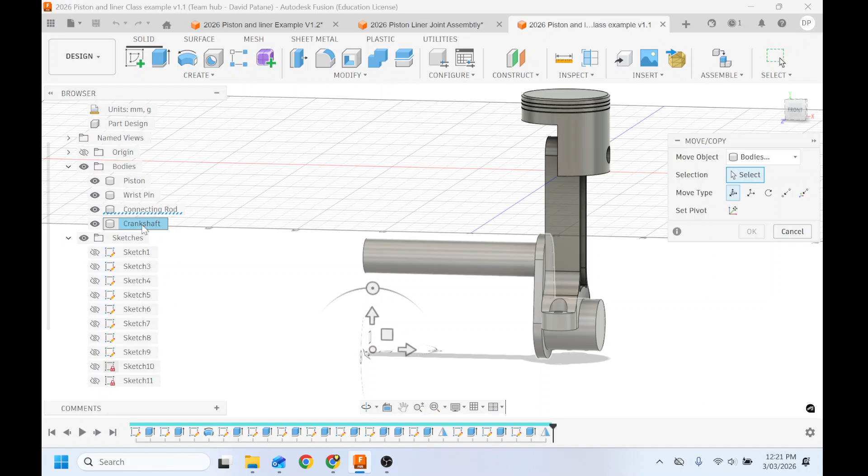So let's say we did our thickness there and we said, oh actually, that's very, very close to the crankshaft there. So now we can start doing some adjustments in CAD. We can go to modify and move or copy. We want to move this particular crankshaft, and we can just move it minus 0.5, which is the way to go, and so there, that matches.

Now I know this doesn't realistically make sense, that's very thin and that's very thick, but oh well, it's just how it turned out.

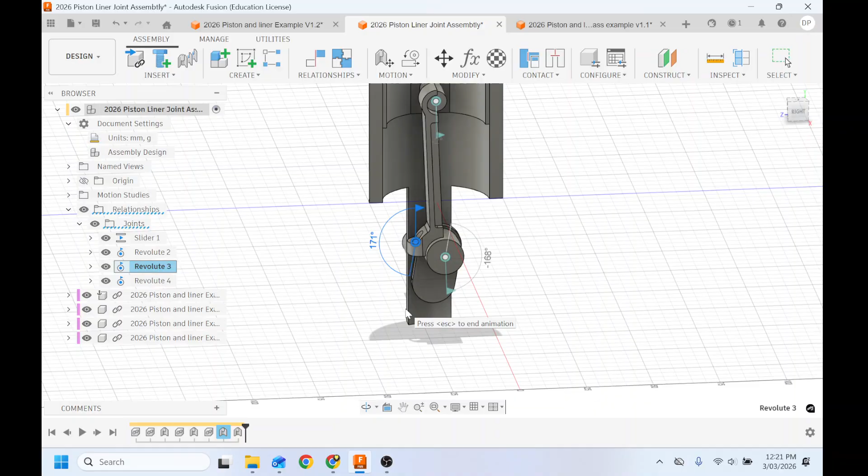So next lesson, I'll show you how we can do a stress analysis. Maybe between now and next lesson, I can show you the replay of it. But I'll show you how we can then animate it, and why we bother animating the particular sketch, so that we can get some nice looking graphics, but more than making it look pretty, we can find some actual information on this particular part.